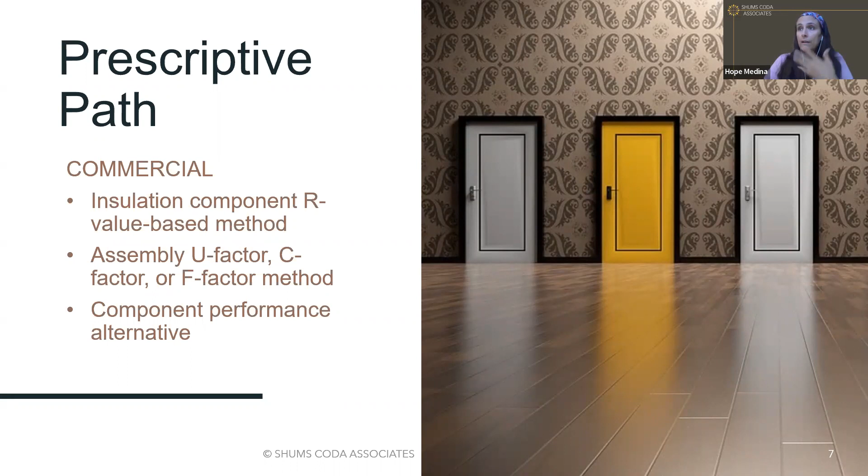So again, when we start talking prescriptive, commercially, there are three options that fall under the prescriptive path. You have your insulation component R value based method, your assembly U factor, C factor, or F factor method, and your component performance alternative. That option didn't come in until the 2015, but it's available for everyone at the moment.

Now let's talk about the residential prescriptive path. It also has three options involved with it. You have your insulation and fenestration criteria, which I think everybody's very familiar with, and then your second option is called the U factor alternative.

That U factor alternative is only available in the 2015 and 2018 editions. In the 2021 edition, it's considered the R value alternative, and I'll get into that a little bit further. Just know there are still only 3 options, and then of course you have your total UA alternative.

That's one of the things that's really great about the energy code - while you have things you must comply with and must do, it also provides you with a whole lot of options and different ways of getting to that end goal, which is energy compliance. So that's one of the things these compliance paths, and specifically the prescriptive path, offer - various options to get there.

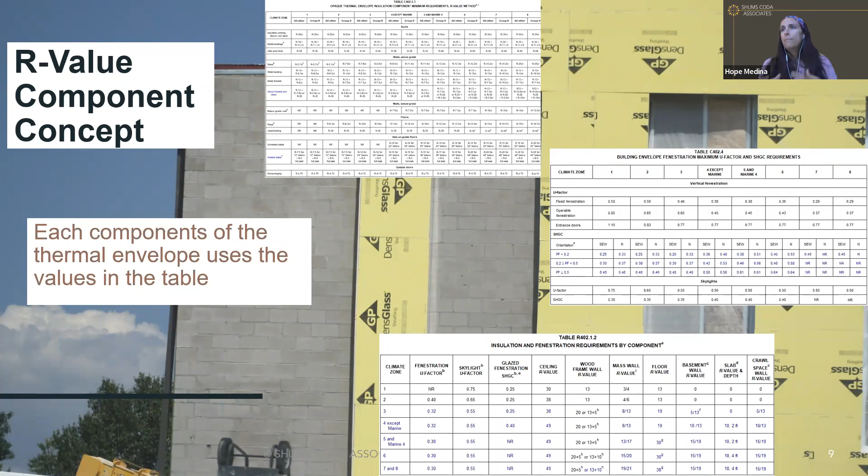Now, there is another option, whether you're commercial or residential, it's the same concept. And what it is, it's that assembly. So it's referred to, on the commercial side, as the U factor, C factor, F factor concept. And then you have the alternative on the residential side.

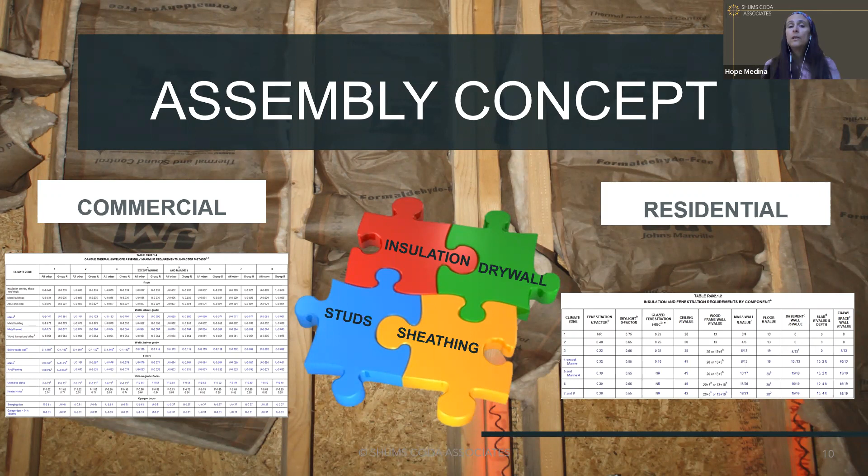This concept is where you're taking the values of that entire assembly. So it's not just what insulation is being put in that cavity or what continuous insulation is going to be installed on those walls, it's everything involved with that. So that could be the insulation, the drywall, the studs, the sheathing, and that's how you're able to get to the U factor numbers to determine it. So that's part of what this concept is.

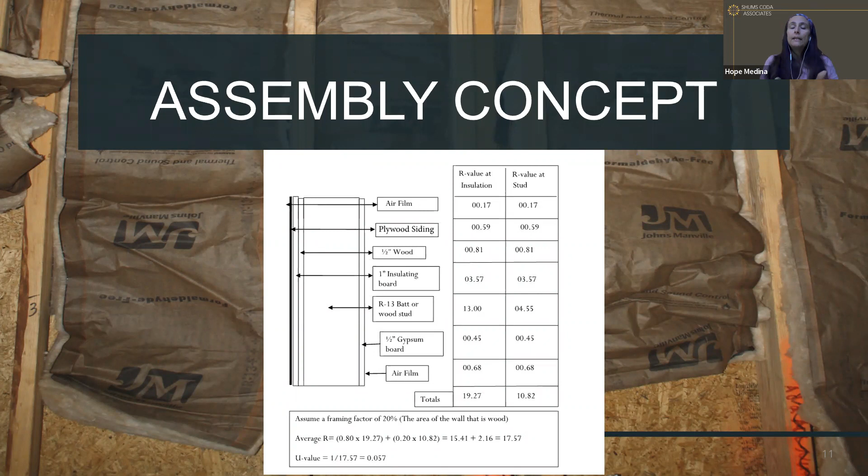How do you determine what those numbers are? If you look to the right, there are 2 columns, and these are going to give you what your R values are, but at different locations. It's going to give you an R value as to where that insulation cavity is, and then there's an R value of where that stud is.

So for each of those rows in those columns, it's giving you the air film, whether it's at the cavity or at the stud, which is the 0.17. And then your plywood siding, at both the cavity and at the stud, is still the 0.59, your 1/2 inch wood, which is the 0.81. And then you have your insulating board, which is 3.57 at both columns.

And this is where it's really going to change, and that's when we start talking about the insulation that's going into the cavity. So the cavity, obviously, it's putting in an R13 batt. So it's going to show that it has an R13 at the column that shows the R value for the insulation. Now, where that's at the stud, it's not going to have that full batt insulation, so it shows that it's at a 4.55.

Now, you go to the gyp board, it's the 0.45, and then you have the air film, and then you have the totals. So at the bottom, you see that where the cavity is, you have an R value of 19.27. Now you have the R value at the stud, which is 10.82.

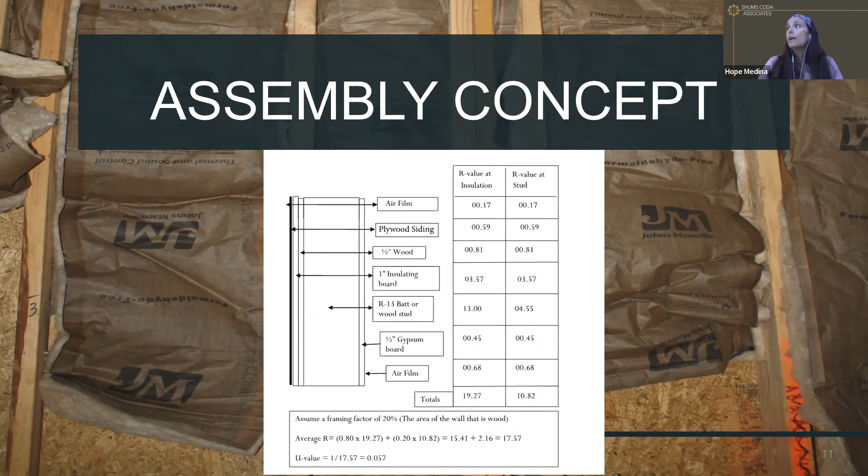So let's talk about the U factor, C factor, F factor, or what would be considered the U factor option, depending on whether it's commercial or residential. It's the same basic concept. What you're doing is a twin building demonstration. You have the reference design for your thermal envelope, and that's going to be the prescriptive values for whichever edition of the energy code you're on.

So you're going to take those prescriptive values, and this is what the number is. Then you're inputting the information as far as what you want to install for the thermal envelope, whether it's just the U factors, or you're using the C and F factors also, depending on if it's commercial or residential. If it demonstrates through these calculations that the proposed thermal envelope is equal to or less than the total UA for what you'd find on the prescriptive house, then it would pass. That's the very basic concept of how this particular option works.

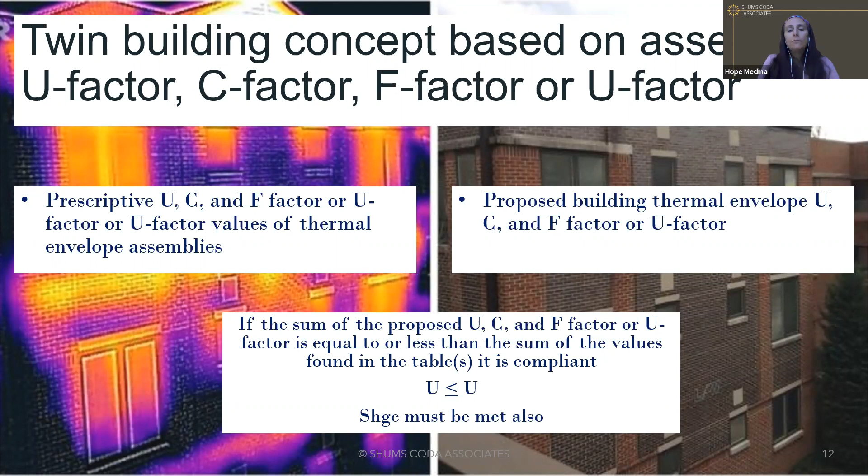Now, if this option is chosen, just know that your solar heat gain coefficient isn't included in the trade-off capabilities for the thermal envelope. You still have to meet what the minimum or maximum values are for that.

So let's dive into a little bit of what is expected for these particular paths, what you have to comply with, and what is really required. So in the insulation component R value method, on the commercial side, with this particular path, there are no trade-offs allowed. Everything is by the book. So you're following, whether it's the 2015 or 2018, all the mandatory items, and everything else that you're going to find within that.

For this one, there really isn't any specifically required reports. I say that because there isn't anything that calls out that says you must provide this if you're going with this particular prescriptive path. There are some reports and documentation that assist you with being able to demonstrate compliance, but it's not specifically called out as a requirement for this particular path.

Now, for this path, you're going to comply with C402 through C405. If you happen to be under the 2015 or 2018 edition, you're also going to comply with C406, and you'll choose an additional efficiency package option. Now, if you're under the 2021 edition of the IECC, you'll still comply with C406, the additional efficiency, but it's no longer options - these are requirements. That's probably a whole class in itself, but it does shift from choosing one option to obtaining so many points. And then you're also going to comply with the commissioning provisions where it falls into play. Not all the time is commissioning required for your mechanical systems, but commissioning is required for your lighting controls.

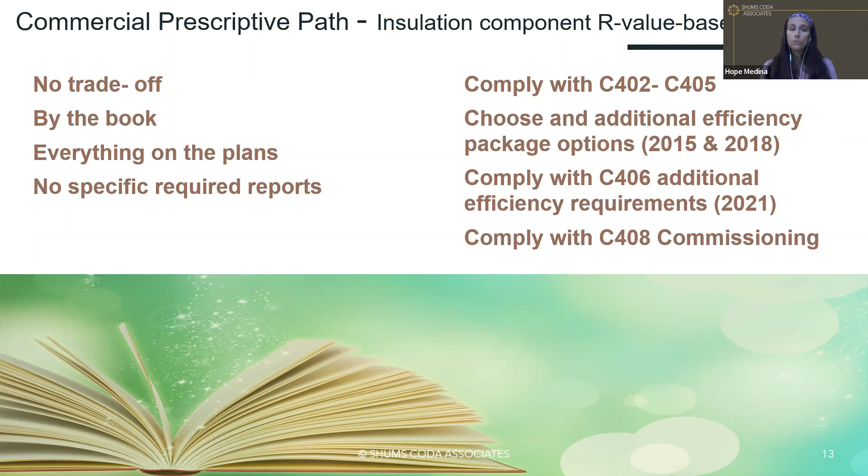Now for the commercial prescriptive path, that is your assembly U factor, C factor, or F factor method. Again, you're going to have no trade-offs with it. It is by the book, and everything should be placed on your plans.

But there is a little bit of potential documentation that may be required, and that's documenting the values that were utilized when designing your particular assemblies. It's probably good practice that if a project is going to go with this particular direction, if you're the architect or designer, you would just submit them. And then as a plans examiner, you may ask for it because it's easier to see how they came up with it. If you had a worksheet very similar to what I showed previously, it probably would help.

If this path is chosen, you're going to comply with C402 through C405. You're also going to choose an additional efficiency package if you're in 2015 or 18. If you're in the 2021, you're going to comply with the new C406 additional efficiency requirements. And again, you're going to comply with commissioning as it sees fit for this particular project.

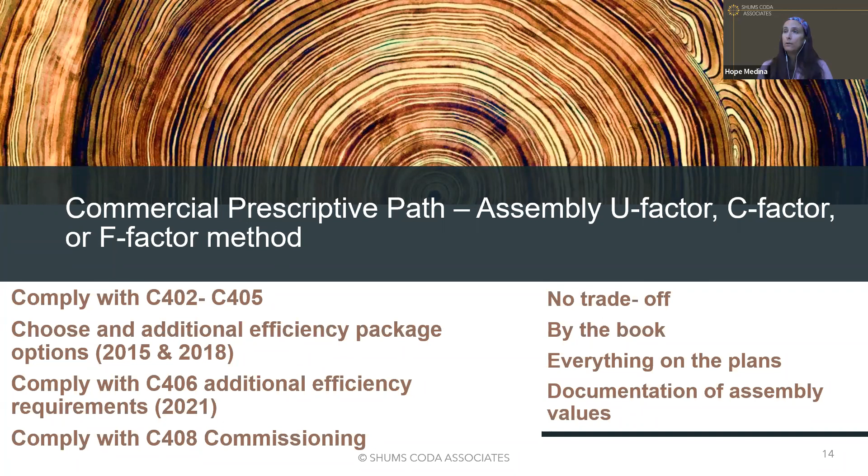I will say that while this isn't necessarily a highly used compliance path for new projects, because when it's new, it's probably a little bit easier to go with maybe some of the other compliance paths. I've probably only seen maybe a handful of projects that have actually utilized this. Where I see maybe more possibility for this is when you start talking about remodels. I've seen where they've tried to utilize this path for that.

So for the commercial prescriptive path, you have the component performance alternative, which is ComCheck. Now, as I stated earlier, it wasn't until 2015 that ComCheck actually was in the energy codes. Prior to that, on the commercial side, it was just one of those readily accepted alternate methods that you didn't necessarily go through a process to use. It just was readily accepted. But until the 2015 edition, it wasn't actually a true compliance path on the commercial side for the energy code. Glad it is now, because it is very helpful.

So for this particular path, it is again by the book, except for the fact that you have the capability of trading off the components of the thermal envelope. Now it's only the thermal envelope, you aren't able to trade off anything beyond what was in that thermal envelope. And everything placed on the plans should match the values in ComCheck. Remember, in 103.2, there's a table that says all these items are required to be placed on the plans, including the insulation material, their value and thickness. So that information should be readily available on the plans, and it should match what you see in ComCheck. Then, of course, you're going to receive a ComCheck envelope compliance certificate.

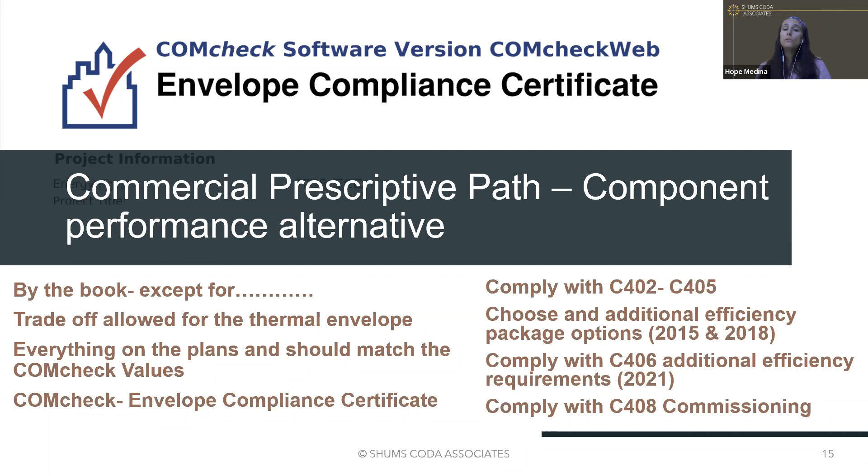Now for this particular path, again, you're looking at complying with C402 through C405. You're going to choose an additional efficiency package option if you're the 2015-2018, or the additional efficiency requirements found within 2021. You're also going to comply with whatever commissioning is applicable to these particular projects.

Okay, now I'm going to do my best to not lose anybody as we talk about the prescriptive options that you're going to find when it comes to the residential path.

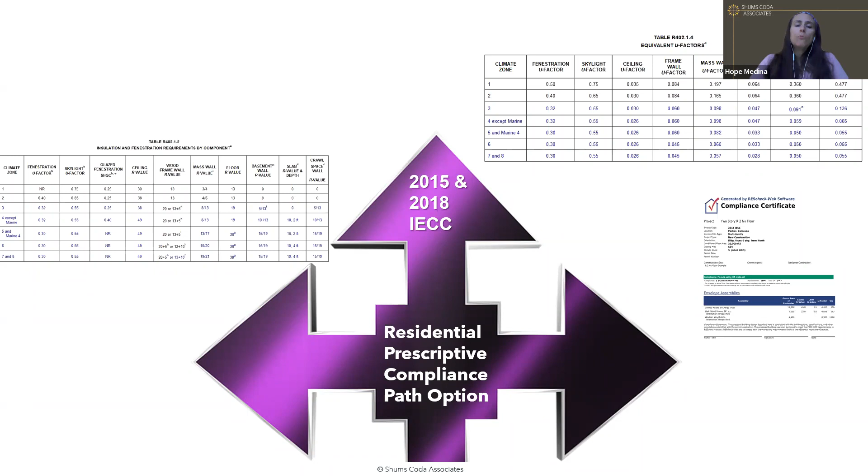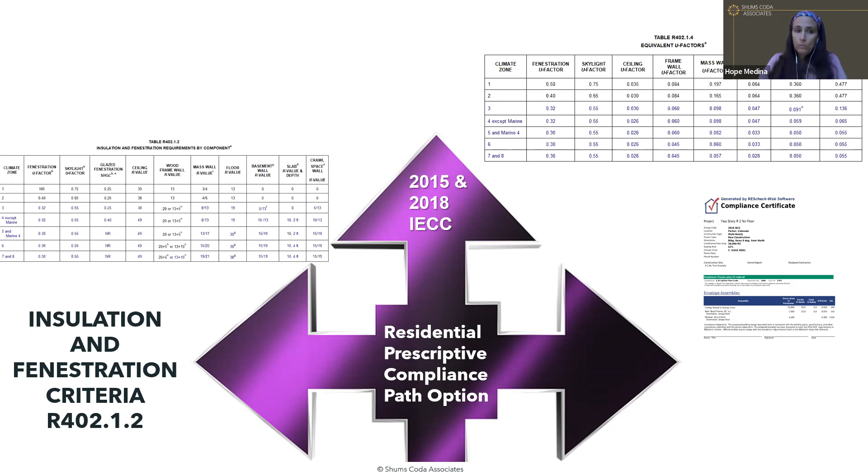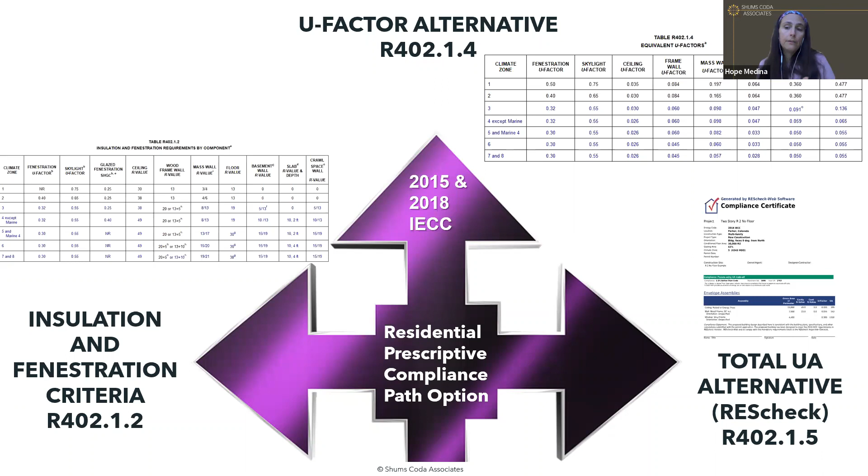The 2015 and 2018 IECC are the same in the sense of what is in there, not necessarily what the requirements are. So for the residential prescriptive compliance paths, you have the insulation and fenestration criteria, that table everybody thinks of when discussing what's required per your thermal envelope. It's almost a no-brainer, everybody knows the values in that table. This is R402.1.2. Then you have your U factor alternative, which is R402.1.4, the table shown on the upper right of the screen. That shows you the U factor options, and all of those are the 0-point number situation. Then, of course, you have your total UA alternative, which is ResCheck.

Now let's talk a little bit about the 2021. The concepts per se didn't necessarily change. What happened is the table we typically see first, 402.1.2, our R value fenestration requirements per component—that's usually the first table we find. Then the second table is our U factor and fenestration requirement. That's the order it's been forever and a day.

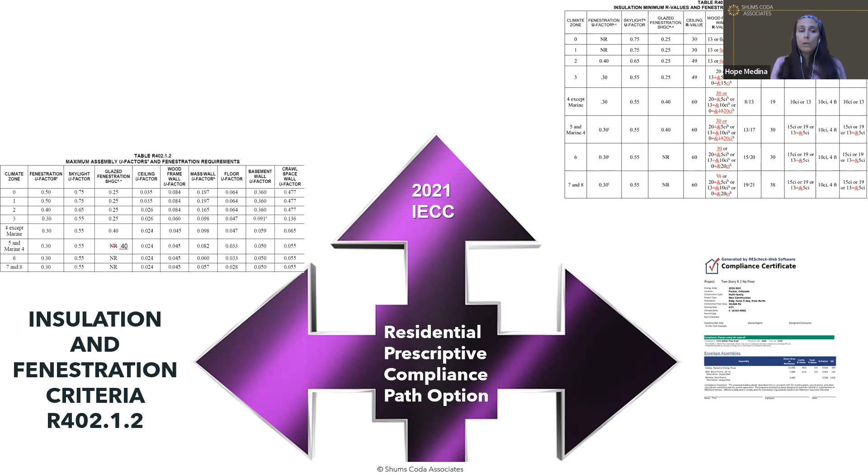In the 2021, they flipped it. So now the first prescriptive compliance path is your U factor compliance path. The reason for that is because, believe it or not, your R values and all the other compliance paths are based off of these particular U factor values. So it was determined that because this is where everything kind of begins and ends, they wanted to place it as the first option in the prescriptive compliance path. So now the U factor table and requirements are considered the insulation and fenestration criteria, and R402.1.3 is the R value alternative, as opposed to the U factor alternative that it was previously to 2021. I hope I did not completely confuse everyone with it.

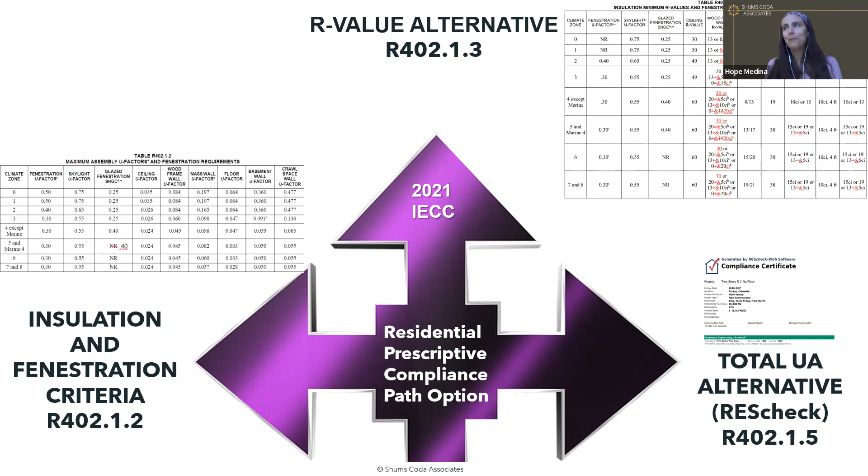The concepts didn't necessarily change. Like I said, they just changed the order that you're going to find them within the energy code. And then, of course, nothing changed as far as your total UA alternative, ResCheck. It's still in R402.1.5. So good old ResCheck is there for us.

So let's talk a little bit about some of the requirements you're going to find with the insulation and fenestration criteria requirements, if you're 2015, 2018, or however that path is referred to in the 2021, which is our R value alternative—but the requirements are still the same. There is no trading with this particular compliance path. It is by the book, and everything should be placed on those plans. Again, you're not really required to provide any specific reports for this particular compliance path. You can submit things, like I said before, but there isn't anything very specific that you need for it.

You're going to comply with R402 through R404 if you are the 2015 or 2018 edition. If you are the 2021, you're going to comply with R402 through R404, but you're also going to have to comply with R408. R408 is the additional efficiency package options that came into the 2021 edition of the IECC.

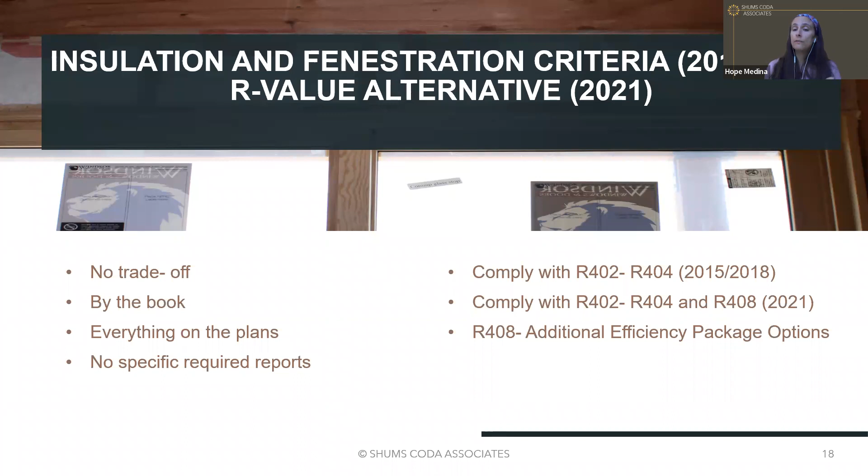It's a lot of things that here in Colorado we're already doing, so don't get thrown off or concerned about this new section of the code. It's very doable for us.

So the next one is your U factor alternative for the 2015, 2018 edition, and what is being considered the insulation and fenestration criteria if you are the 2021. This is not a path that you can do any trade-offs. It is, again, by the book. You're going to put everything on the plans, but you're going to need to provide, or it's suggested that you provide the documentation of your assembly values. Again, with this path, just like with the previous one, you're going to comply with R402 through R404 if you're the 15 or the 18, and you're going to comply with R402 through 404 and 408 if you're the 2021.

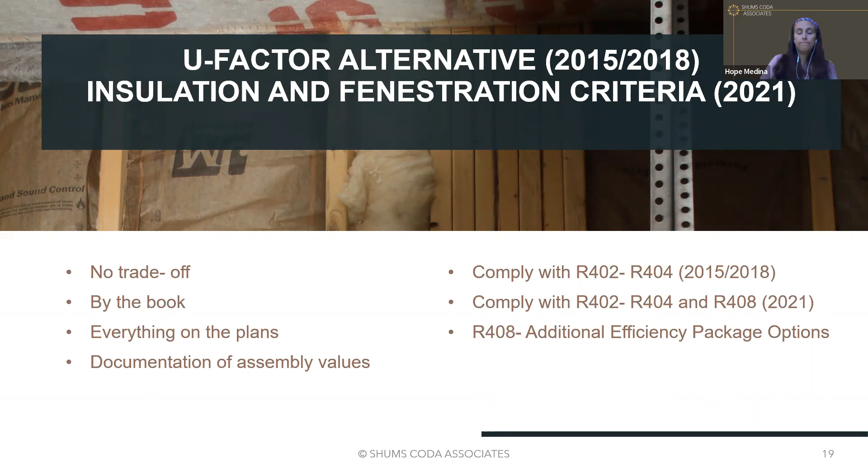And then, of course, you have your total UA alternative, which is REScheck. It's by the book, except for the fact that you are allowed to trade off for the thermal envelope, except for slab edge insulation. I know in the past, slab edge insulation has been demonstrated that you can trade that off.

In recent months, PNNL has been doing some work behind the scenes. It's never been an option within the energy code that the slab edge insulation can be traded off. It's a requirement. So now it doesn't matter what edition you utilize as far as Res Check, you are no longer permitted to trade off that slab edge insulation. Just an FYI, it's a very recent development that has happened with Res Check. If you have further questions, feel free to reach out to myself or Gil.

Gil has been in direct communication with them about this particular item. So with this, and really with all of these prescriptive paths, everything that you see on the plans should match your Res Check, but also should match the values that you're going to find in Manual J. Often I find that the Manual J doesn't match those items, and that's just because whoever did the Manual J was there at the very beginning, and then the changes just haven't been passed along to them.

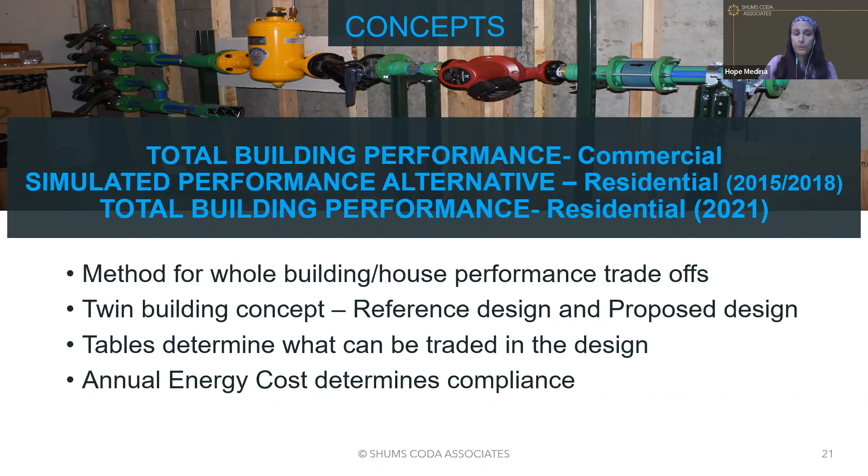So if we talk about the commercial aspect of the total building performance, that annual energy cost documentation report that they should be providing you needs to show that it is equal to or less than 85% of the annual energy cost for that reference design. You're also going to utilize tables C407.5.1 if you're 2015 or 2018, and for the 2021, you're going to utilize C407.4.1.

Now, here's where it gets a little bit tricky. If you're the 15 or 18, you're very familiar with the fact of sections that are listed as mandatory. You'll have the little section, it has the parentheses, and it says mandatory. All of those are required to comply with, even when you're going with this particular compliance path.

Now, if you are in the 2021 code, there are no more mandatory and prescriptive sections. Everything is considered mandatory. But there is a table that lists all the items and sections that were previously designated as mandatory. So instead of going through the whole code trying to find all the mandatory sections, there's this nice, neat table at the very beginning that says you have to comply with these particular items. It's great, I'm so glad it finally got into the code.

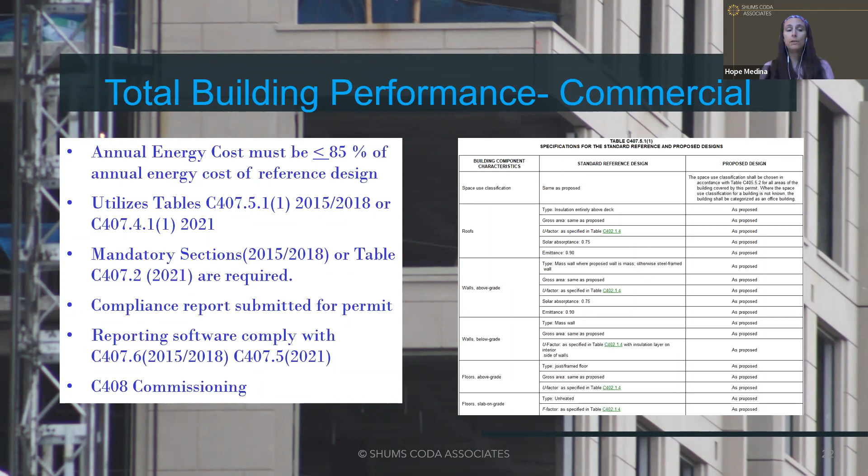Now, the other thing required is a compliance report submitted at permit application. It demonstrates that the building, as designed, will have an annual energy cost less than 85%. The software used for this compliance path needs to comply with C407.6 or C407.5, depending on the edition you're on. And then, depending on what's being installed and utilized, you would comply with the commissioning aspect of it.

Now let's talk about the residential side of the performance compliance path. For this path, you again provide the annual energy cost, but this time it only has to equal or be less than the annual energy cost of the reference design. A little different than the commercial side, where it had to be 85% of it. This one just says equal to or less.

You're going to be utilizing various tables. If you're on the 2015-18, you use table 405.5.2. And if you're on 2021, it's 405.4.2, which is what you see on the right-hand side of the screen. It's just an excerpt of a section of the table. There's much more involved as far as how it's designed.

As you can see here, it gives you the parameters of what's behind the scenes. You have your standard reference design, telling you what to input for that standard reference design—whether it's a mass wall or wood frame, the gross area, the U factor, solar absorptance. Then for your proposed design building, you input what is proposed to be installed. Now, in that column, it may have sections that say 'as reference design.' If it says that in the proposed design, that means it isn't tradable through this compliance path.

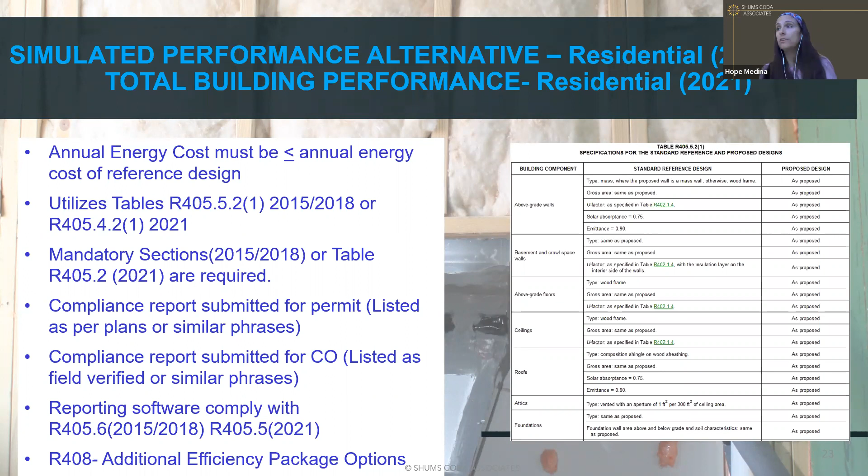So we're hitting the home stretch here. We're on this last one.

As far as commercial goes, the very last option that you have is the ASHRAE 90.1. As I said, you would go into chapter 6 to determine which edition of ASHRAE would be required for you. Now, it is not something that you can pick and choose, doing IECC for the thermal envelope and then mechanical out of 90.1. Whatever is chosen for the project, it's either all or nothing. So you either do everything to 90.1 or you utilize the IECC. So that is another option.

Just so that you are aware, ASHRAE has a whole plethora of compliance paths that are options within ASHRAE itself. So not only on the commercial side do you have basically the three compliance paths with the options in the prescriptive path, you also have additional compliance path options that you can find within ASHRAE 90.1. So with it, when everything is said and done, a designer should be able to find something that's going to be real comparable and highly usable for whatever project that they're going to be working on.

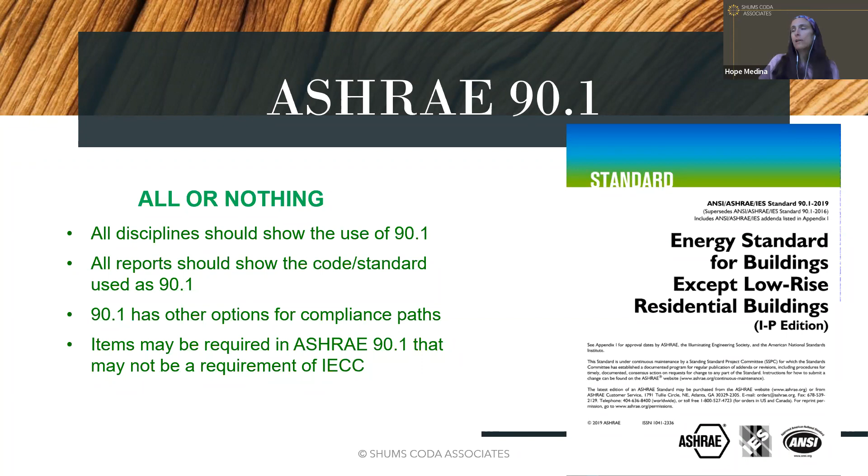So let's talk about the last one for energy, as I know we're getting very close to the end here. The newest, I would say, addition to the compliance path is the Energy Rating Index, commonly known as the ERI path. I think many times it's referred to as the HERS rating.

And while HERS is often utilized maybe for some of this, ICC is very cognizant about the fact of making sure that what gets put in is somewhat of a non-proprietary component of it. So this is why it's listed as the generic term of the Energy Rating Index and not a HERS score or a HERS rating.

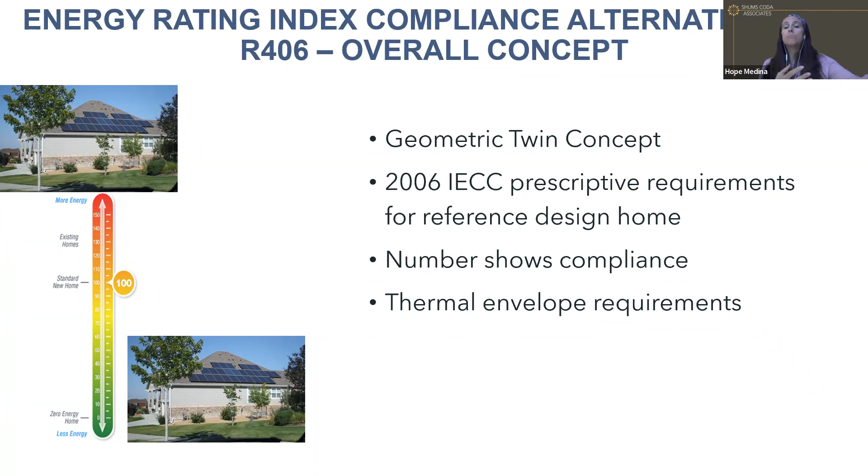But this concept is, again, utilizing that geometric twin where your quote unquote design referenced home is utilizing the prescriptive values of the 2006 IECC. And then for your proposed values, you're utilizing what you want with some requirements that have to be in there. And you're demonstrating compliance by numbers. This is a compliance by number situation. And that number is demonstrating how much of a percentage you're better than if this had been done to the 2006 prescriptive value. So that's why there's the number component of it.

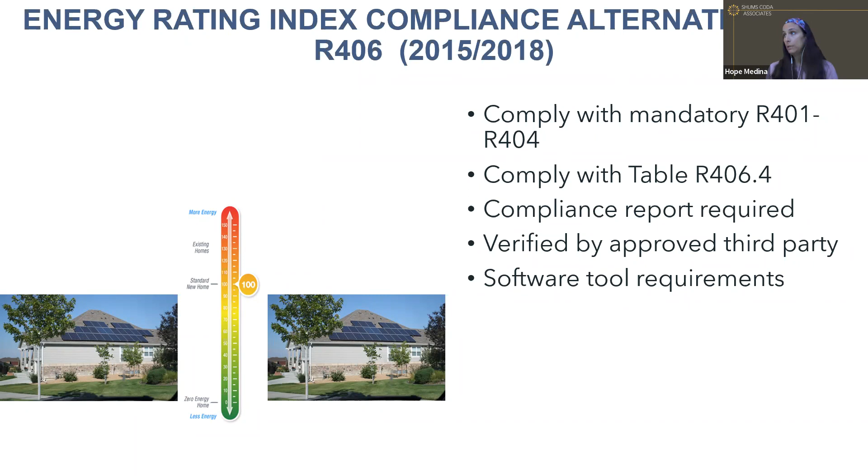So if you are the 15 or 18 component, you're going to comply with the mandatory provisions that you find through R401 through R404. You're also going to comply with the requirements of table R406.4, and you are going to need to provide a compliance report for this. Now, it is required that this is verified by an approved third party, and I do emphasize approved third party. And then there again are requirements as far as the software tools that can be utilized to demonstrate this.

Now, if you're the 2015 edition, this is table R406.4 that you are going to need to comply with. So the Energy Rating Index number that you see there is the maximum number you can have. So if you happen to be climate zone 6 and you receive a 53, you are good to go because you are even better than what the maximum number is within this table.

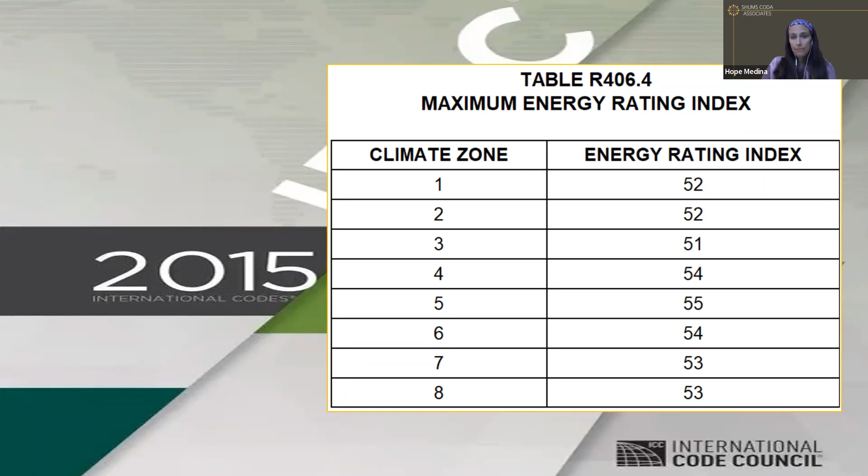Now, if you are the 2018, if you notice, take a look at the numbers there, and the numbers here, those numbers increased from the 15 to the 18. And you say, hey, Hope, that seems really odd. Why would they increase when typically things kind of get, for lack of a better word, ratcheted down?

And part of that is because in the 15, it was a brand new compliance path. So you have to start somewhere. You have your jumping off point. And so they were saying that at that point in time, it was very difficult to be able to get to those numbers without including solar into it. And so that was heeded, and people took note of it.

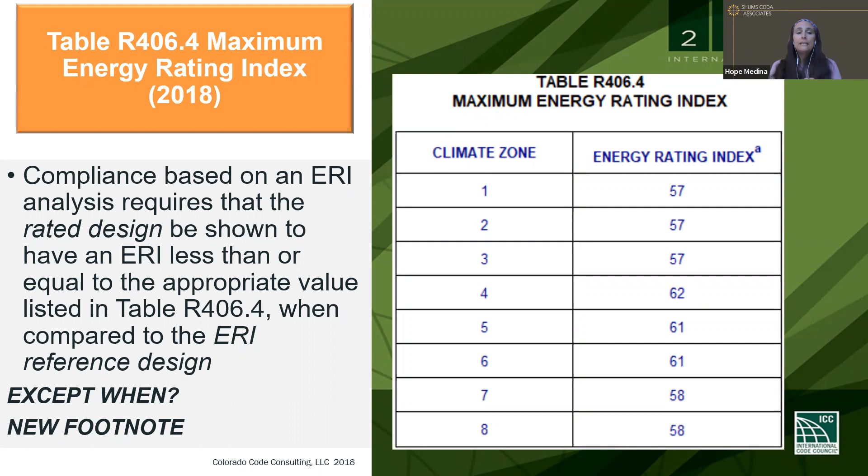For the 2018, they increased the numbers. And as a compromise, what they did is they added footnote A. And what footnote A says is that, okay, great, you have to get to these numbers, but to get to these numbers, if you utilized on-site renewable energy to be able to get to this number, now there are some requirements.

Those requirements mean your thermal envelope cannot be less than the value you'd find for the 2015 IECC. So those thermal envelope values can't be less than what you'd find in the '15, and your solar heat gain coefficient cannot be greater than that either.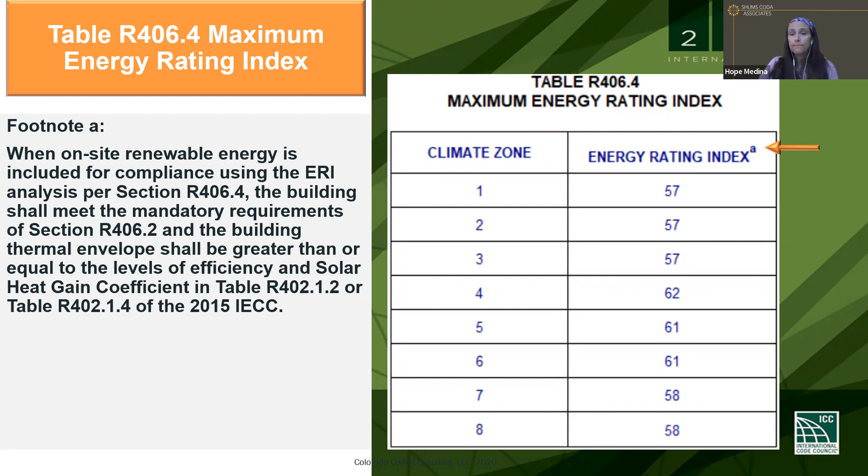Now in the 2021, because this whole thing continued as far as renewable energy and all the issues that kind of manifested around that, everybody came to the table and they came up with some very interesting solutions, and I hope you all think of them as solutions as far as this particular option here.

So for this particular compliance path, just like on the performance path, they created a table that tells you what sections previously were listed as mandatory. It's a great thing. And then they added this new component: an equation you'll utilize if you're using on-site renewable energy as part of getting to your number, and something completely different if you did not include renewable energy into your number. You're also going to comply with the values found in table R406.5.

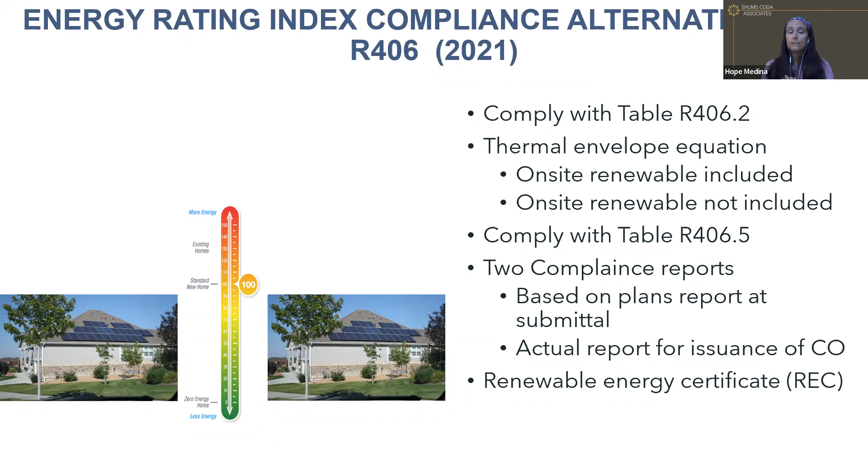Now this time around it's required that you provide two compliance reports: one for submittal, for your plan submittal and permit submittal, and then an actual report for CO. Another component that came into it is a renewable energy certificate, or RECs. So if you utilize RECs to get to your numbers, you now have to disclose that information.

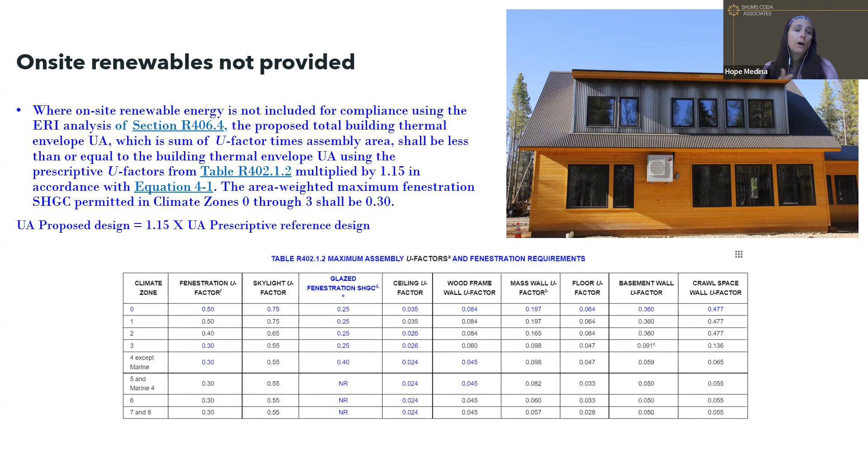So if you are not utilizing on-site renewable energy to get to your number, you're going to be utilizing this equation: your proposed design has to be equal to or less than 1.15 of your UA prescriptive reference design. So it gives you somewhat of a break in trying to get to those numbers.

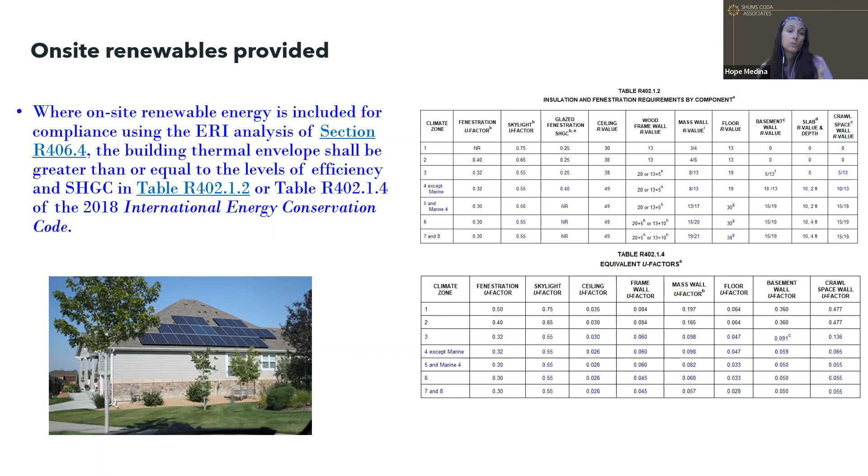Now the other option is if you are utilizing on-site renewable energy to get to your numbers, you are going to have anything equal to or greater than as far as your thermal envelope when it comes to that, and that comes out of the 2018 IECC. So these are the numbers you see here on the screen, and with that you should be able to accomplish and get to these numbers.

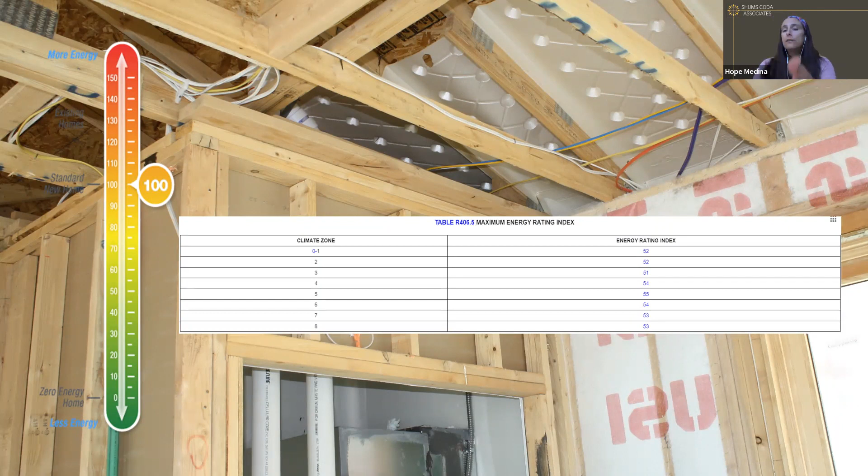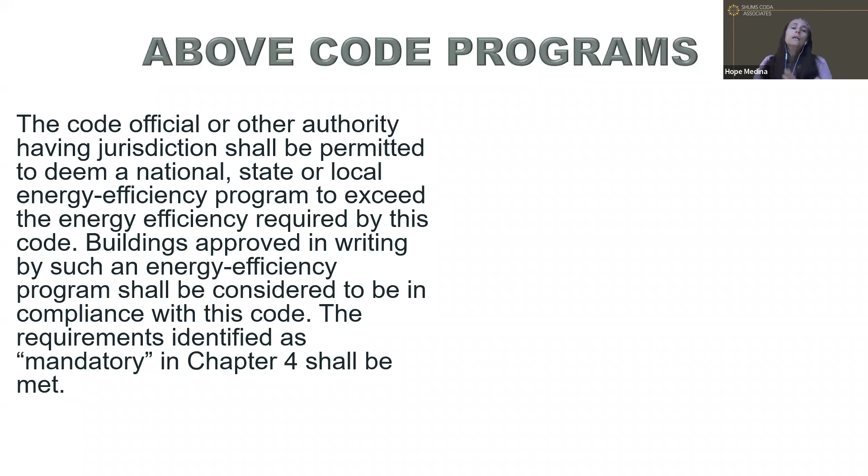As you can see here, these are the 2021 numbers, and they're more in line with what you saw towards the 2015, while acknowledging the fact that there is the on-site renewable energy concept coming up in all of that. So I would be remiss not to talk about above code programs.

There is an option within the energy code that says you can utilize above code programs. They have to be approved, and you still have to do what is considered the mandatory items found in chapter 4, or utilize the mandatory table. And there are a lot of above code programs out there.

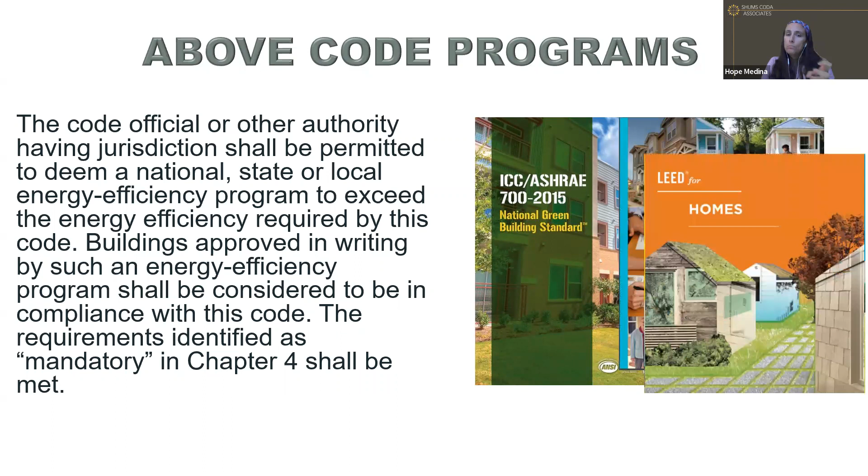I just caution you, when you start accepting these or looking at them, you might want to take a look, because not all of them are created equal. Some of them work with the energy code, the IECC—they understand it, they build off of it. And others do not; some of them go back to like 2009. So just keep that in mind.

But an above code program is still, in my opinion, considered another option for an energy compliance path. So with that, do we have any questions?